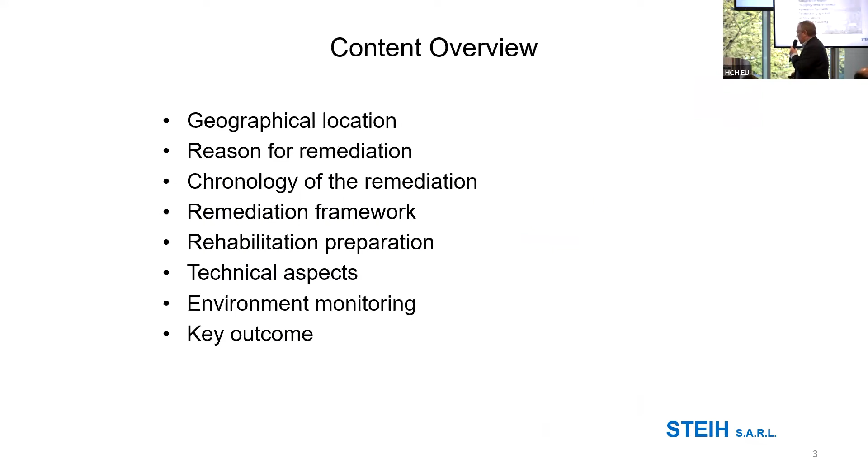So first of all, you see where this project is located. It's affecting 3 countries. I think it's clear it's between Switzerland, Germany, and France. And this is as well a kind of constraint in this project, because when you have to deal with authorities, you cannot only deal with French authorities because it's on the French side, but you have to deal as well with the Swiss authority and the German authorities. And I can tell you, we do not have the same regulations.

So I heard during these 2 days what you want to do in the EU and so on. I can tell you, work on that first. To be honest, when you look at what Germany and France are doing, we are pretty close. So we base our approach on risk assessment, risk identification, and so on. But it's not the case in Switzerland. Switzerland is based only on value, and in Switzerland, 0 is 0.

So if you have a few milligrams, that's not good. You have to have 0 at the end. In the same way, concerning the groundwater, this was a little bit easier on the Switzerland side than on the French side and the German side.

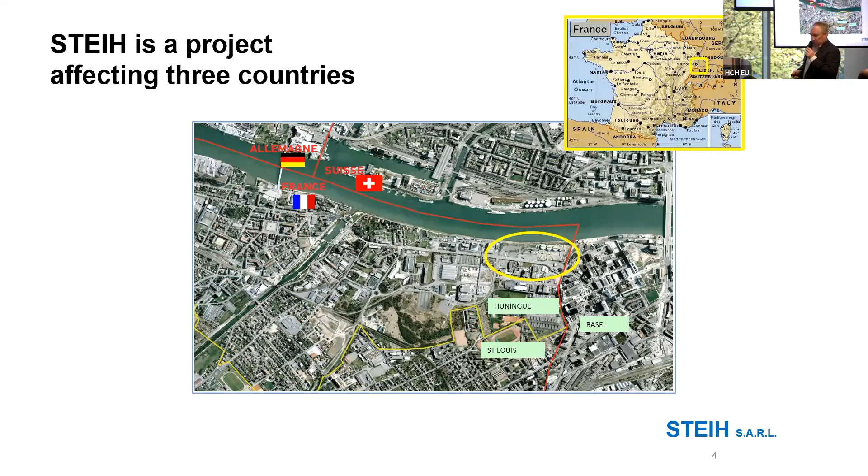This is why we decided to apply a new rule, which is the Novartis rule. And the Novartis rule is to take the most constraining requirement from each country and put that in place. This is why this project is, I would say, a kind of pilot.

The reason for rehabilitation is clear. I think what was expected, and this is derived from what I just said, is that we wanted to have the possibility to use this land without constraints. So the objective of rehabilitation was residential with private garden, how we call that. So that's a specific scenario.

What is as well important to mention, Novartis took the responsibility to remediate this site, but Novartis said no liability on that, no responsibility on that. The only reason why Novartis did that is because they sometimes owned the site, but they decided to remediate and put all the costs into that without having any responsibility on that.

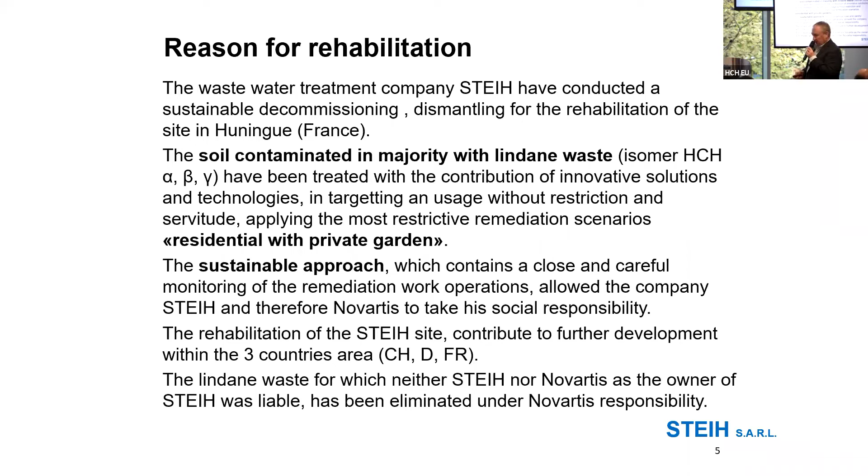That's very important. So the chronology of this project, again, we started from the left-hand side, the well-known picture, to the right-hand side, the green picture. In between, we had several steps. One step is when the site was acquired by Sandoz, a former company of Novartis. And it was decided to build a water treatment station.

As you can see, what happened at that time, because before PCUK, Ugine Kuhlman had put all or some of the Lindane mixed with concrete in the soil. And when it was decided to build this wastewater station, all the sites were mixed again. This is very important because it was then very difficult to know where we have which concentration.

Okay, then the wastewater station was working until 2011, and then it was decided to dismantle that and remediate the site completely. You see the remediation started, from a planning point of view, in 2005, but really started in 2011, and I took over in 2012 until 2019.

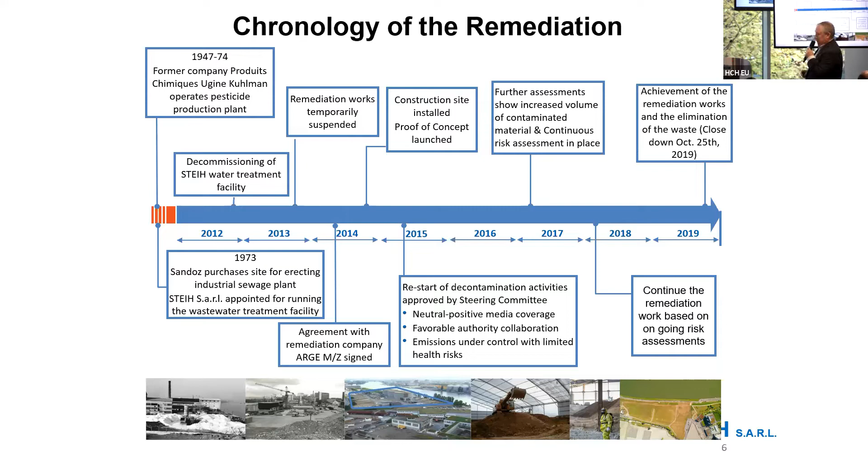The first step on key lessons. The first important lesson we faced is that the objective and clear requirements need to be written and agreed upon what we want to do. These bases build the roadmap for the whole project. It's very important that everybody around the table, not only the owner, but also the stakeholders and the neighborhood, should be clear on what we want to do and how we want to proceed.

Then in the project we need a clear governance structure, meaning we need several platforms, an operational platform and a decisional platform, and it's important that this works very well. At the end, it's the management who decides, but it's also the neighborhood and the stakeholders who decide with that, and that's very important.

Then we had a big issue during the process of this project: we had to stop sometime these projects. It was in 2013. This is why it took so long, because we lost about 20 months. We were stopping completely the project.

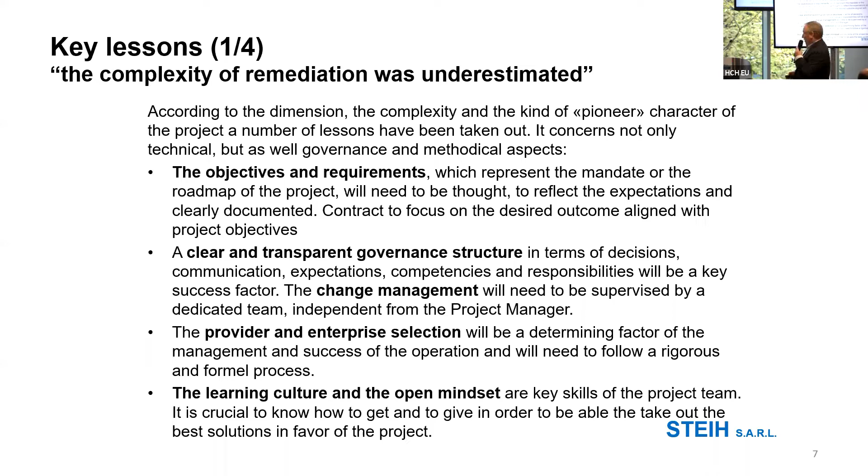So the remediation framework, I would not go through really. I explained we went with a guideline, the environmental code of France. But as I said before, it was the basis, we really supplemented it with the Swiss codes, the Swiss regulation, and also the German regulations. We took the best of all three, not to ease the situation, but to be sure that we would comply with everything in the 3 countries.

The rest is, as we know, how we proceed with the remediation goal, with the preventive residual health risk, and so on. At the end, we control what we have achieved and how the project has brought in a health risk assessment.

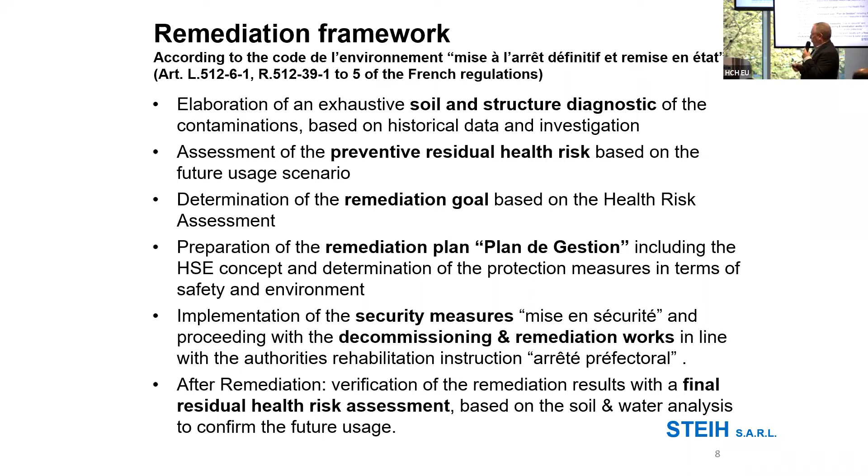The rehabilitation preparation is an important topic, and why is that important? When we took over, it was not clear to us what was really in the soil. So we knew it was HCH, but in which concentration and where do we find what? That was not so clear to us.

So it's very important that as a first instance we evaluate all the historical data, that we ask people who were working, for example, on the STEIH site or before by Ugine Kuhlman, what they remember. I think it's very important, even more so because we started this project without having done only investigation first.

Not making investigation and submitting a budget for a project is a nightmare, I can tell you, and we will see that a little bit later. So it's very important that you make an exhaustive investigation before starting.

It's also important that you look at the benchmark, that you find similar projects worldwide, that you discuss with the people around the table and ask questions to find out what fits best to your project. At that time we did this benchmark investigation, but I can tell you, I did not find really projects with the same situation we were in. We were a little bit pioneers and pilots on that.

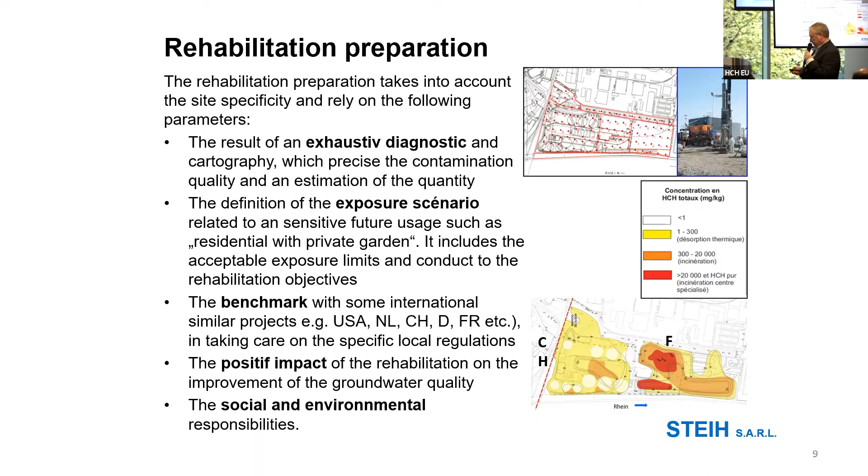What is also important, you have to clearly define before starting any work on such a site all the thresholds. This was an issue, because we did not find in the existing literature any threshold for air, dust, and so on. So we had to elaborate that with the Swiss authority and the French authority. We defined together this threshold, which built the basis on which all the control systems behind would be controlled.

We then had to monitor what's going on, and we needed to define clearly when we are in the green, when we are in the yellow or in the red, and when we have to stop. What is also very important is to define what kind of action you have to take when you go over this threshold.

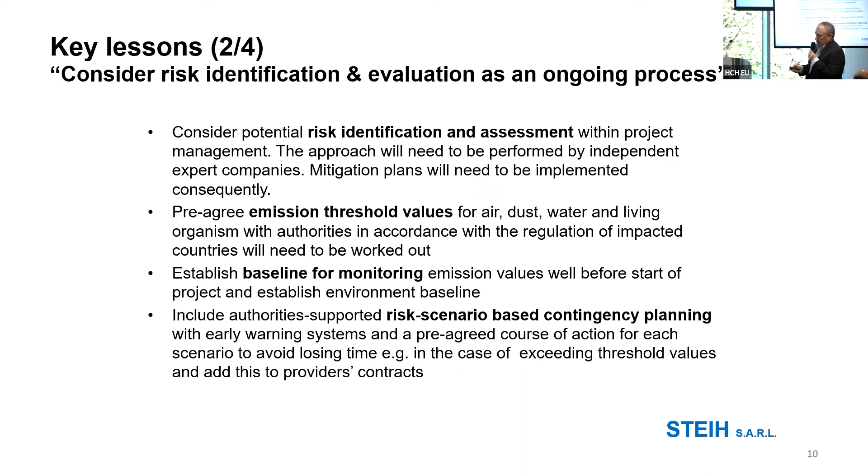The authorities were an important part. We did not include the authorities from the beginning, only the French authorities. But at the end, we had a weekly meeting with the Swiss authorities and the French authorities to go through where we stand and what are the next steps. They even validated some commissioning—if we put equipment in place, they validated the test sheets so we were clear we were going in that direction. At the end, we felt we were a team with the authorities, and this helped a lot.

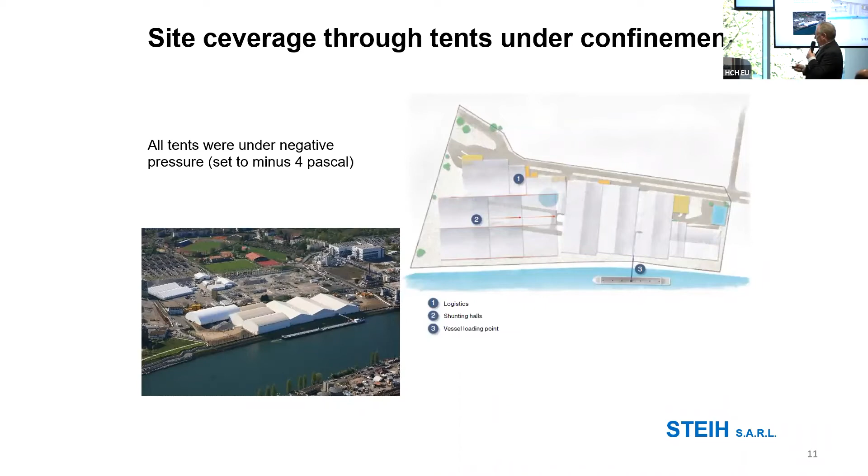The site was completely confined, so we had under pressure, -4 Pascal. This was also monitored—we had a graphic on a weekly basis to see if we could stay at -4 Pascal.

Just to give you an idea of what we did: the site was 55,000 square meters, and the groundwater is about 12 meters down. This means we have about 660,000 cubic meters, and from these 660,000 cubic meters, we excavated about 450,000 cubic meters. So 70% of the soil here was excavated and treated.

This was the first picture, but at the end the picture was not the same, because we drilled about 70 holes and it was not enough. The question is, when you make drilling, do you need to do more or less? It's very complicated because it depends on where you are drilling, and drilling is a cost factor. The question is whether this cost factor is related to what you can gain or not. In this case, we should have said okay, we don't drill, we excavate everything—but we didn't know what was coming. That's the point.

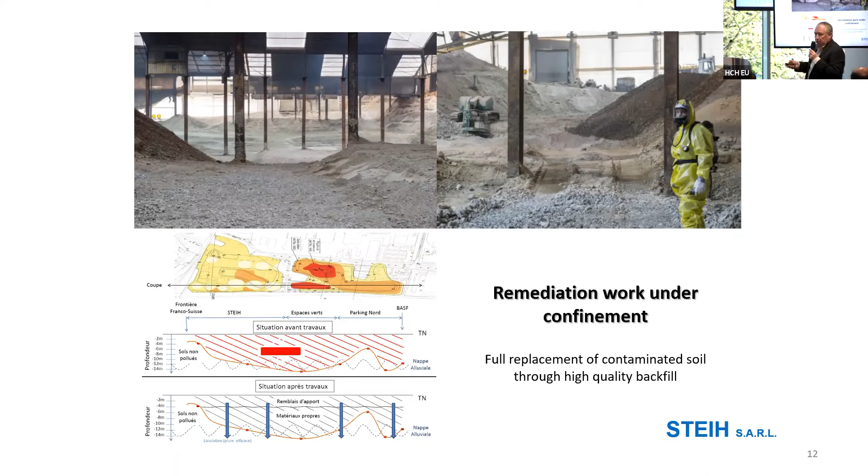We had several transport logistics. The high concentration material went on barrels taken by truck. Then we had containers put on a train, and at the end we also used a barge, a cargo. We used the opportunity of being close to the Rhine. We even extended our cargo into a twin cargo about 180 meters long, which could transport 5,500 tons in one shot. That was very important for gaining time.

At the end, we excavated about 800,000 tons, and from this 800,000 tons we eliminated on the treatment side about 711,000 tons. Practically 90% of that was transported to Amsterdam.

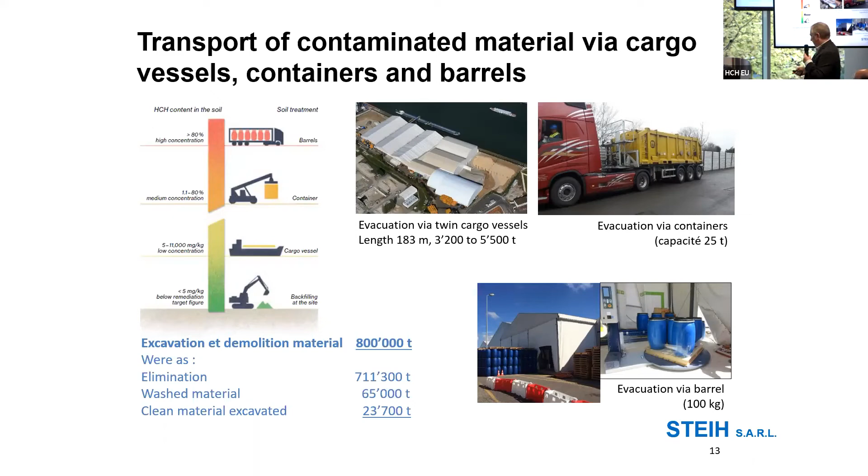As I said, we used the Rhine—it was an opportunity for us, and we gained a lot of time and money with that. But there was a period where the Rhine was very low and the ships couldn't go on the Rhine, and we lost 7 months there. If you count the 7 months plus 21 months before, we lost about 28 months over the 2012-2019 period. This is why we can say the project was really about 5 years.

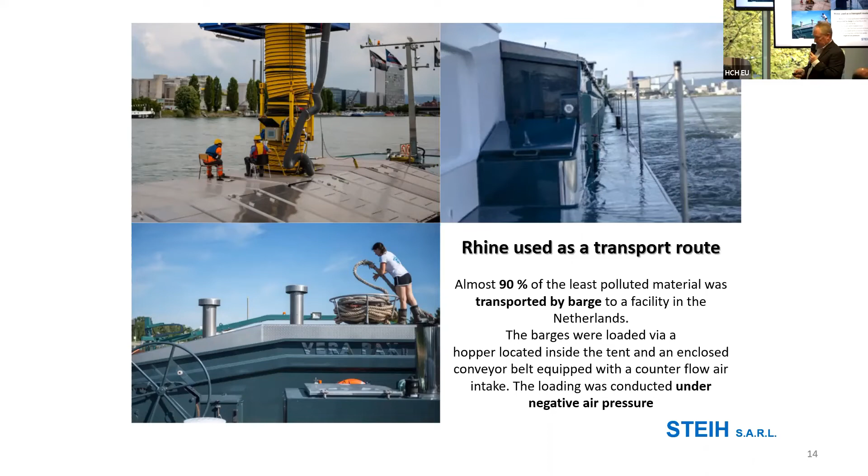The third point on lessons learned. So the estimation of volume is critical. It's really the estimation of volume that gives you the costs, which are the cost drivers. So you need to find a solution for how you can estimate the volume accurately. I have no recipe, I cannot tell you. It depends really on the site, but I think that's a key factor. You have to think about that.

Proof of concept is very important: before doing something, test it, make a pilot. You have to check if what you were thinking about doing works or not. And as we had to stop the project, the first thing we did, we needed a proof of concept. So when we implemented all the new measures, we started with a proof of concept before really starting on the productive side. And it helped a lot, because you find out a lot of topics which you did not see before.

Commissioning procedure, as I mentioned before, so we had real commissioning procedures with the authorities and with the sign-off of the authorities. I think this helped a lot, because with this you take more time, you take the time to think, and the authorities are a new eye who look over what you did, and this helps a lot.

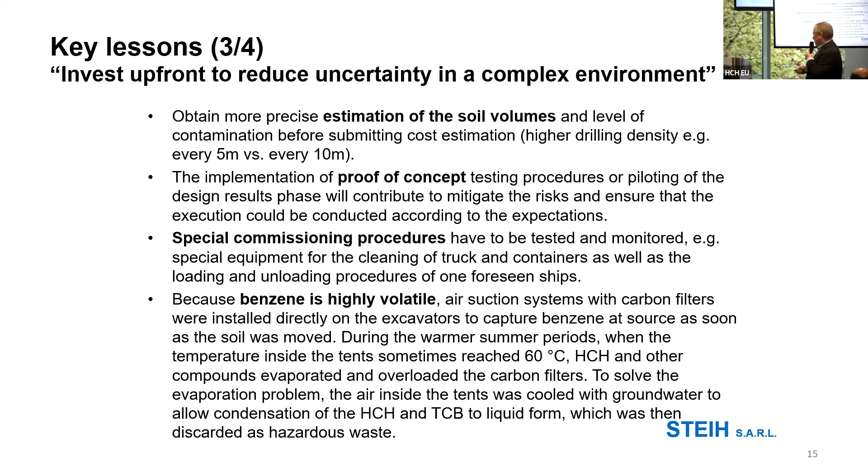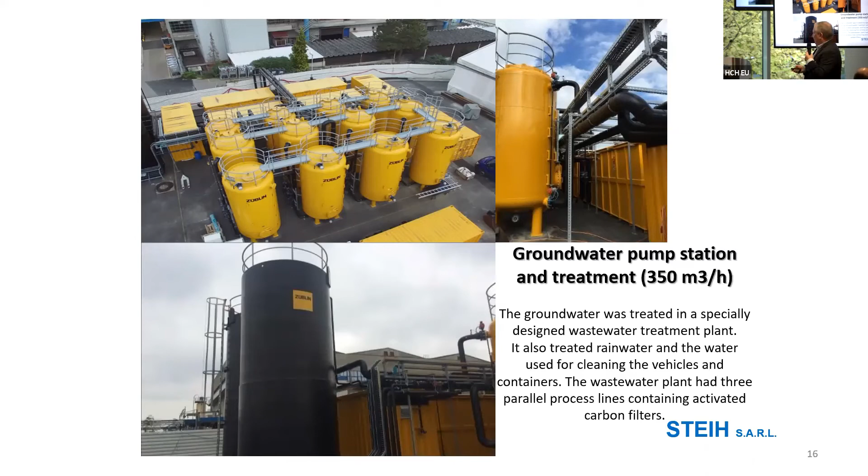Groundwater pumping, it's clear. During the whole period, we had to evaluate and treat the water. It was the groundwater, but also the rainwater, and so on. The air regeneration, the same. So we had a rigid extraction network with carbon filters, that's really normal.

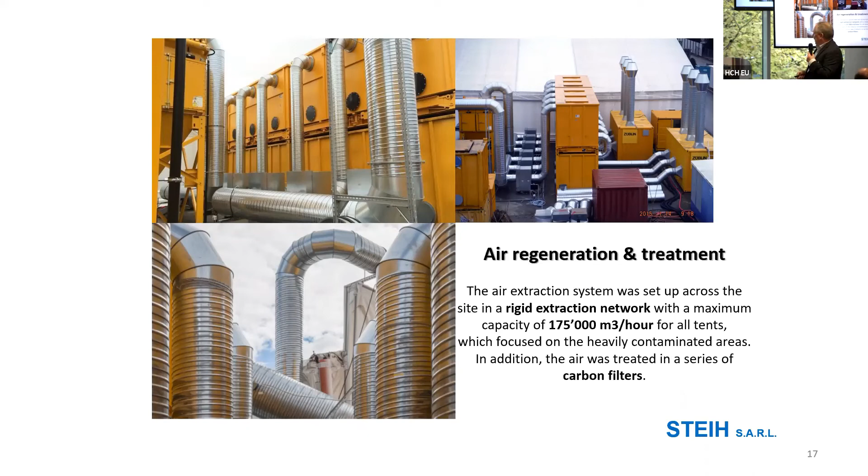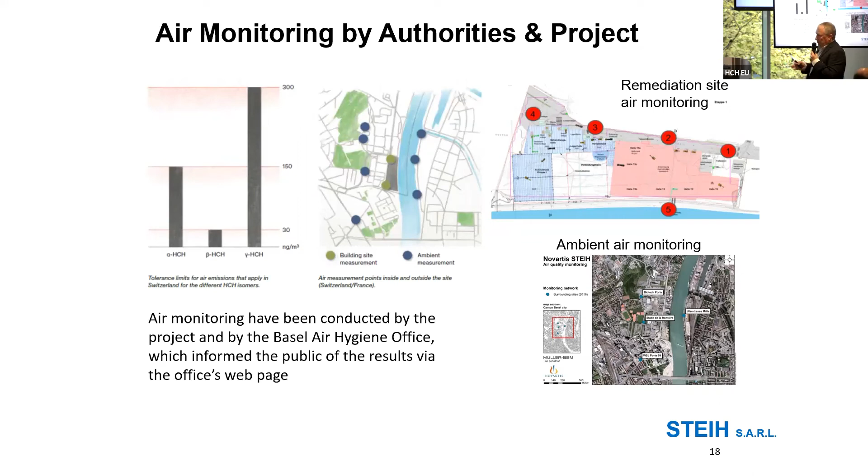And then around the site, the air monitoring covered the ambient air of the site, but also the remediation site. We were controlling this 24 hours, 7 days a week. And we determined what we want to control, how we want to control it, and what action we need to take once we go over the threshold. By the way, we never crossed these thresholds, never. And also when we had to stop this project, there was never danger for the people. We never crossed any threshold in this regard, because we stopped before.

The fourth topic, communication. Communication is a very important, critical topic. It's the communication toward the public, which is very important. You have to tell them the truth. If you have something which is not good, which is bad, you have to explain it and tell them: that's the situation, and this is how we want to correct it. That's very important. At the beginning of the project, it was decided not to communicate to the public, but I think that's very important in each project. So you need to be really candid and open and communicate to the people.

The infrastructure is important, that it complies with the specification. Maybe it's something logical, but sometimes it's not the case. We had this issue with our tents, for example: the tents were not robust enough at the beginning, they were not complying with the specification, and we had to reinforce all the tents.

Readiness assessment, that's very, very important. You should ask yourself and have some exchanges to see where there are open questions which are not answered. You have to try to answer all the questions before starting anything. Even when we are talking about smells, because we have a lot of smell, which is not a danger, but each person has a different level of tolerance, and you need to be careful about that. And you need to be ready to show that you have no problem with that.

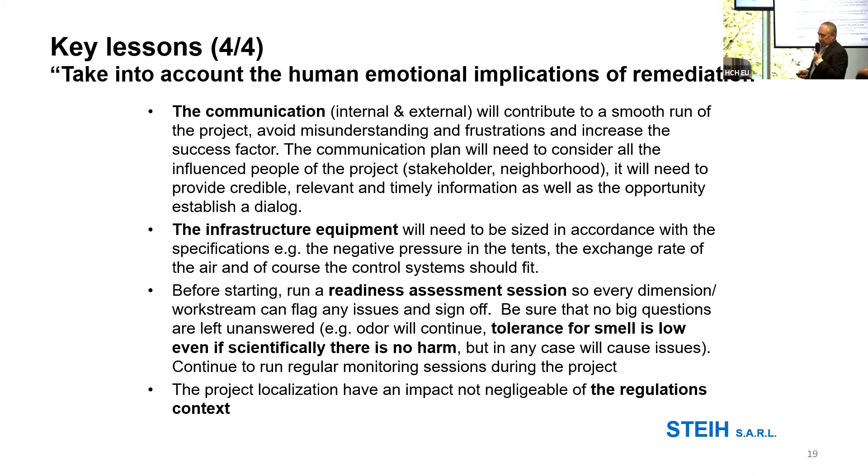And the localization is important. I started with that. The regulations change from one country to another.

And we also made some studies on the groundwater. We estimate that from a groundwater point of view, in between 8 and 40 years we should normally find drinking water, but it really depends on the assessment and the parameters. But we are on a good path. We are monitoring the groundwater, we are monitoring the site at the moment with the French authorities, and it is going in the right direction.